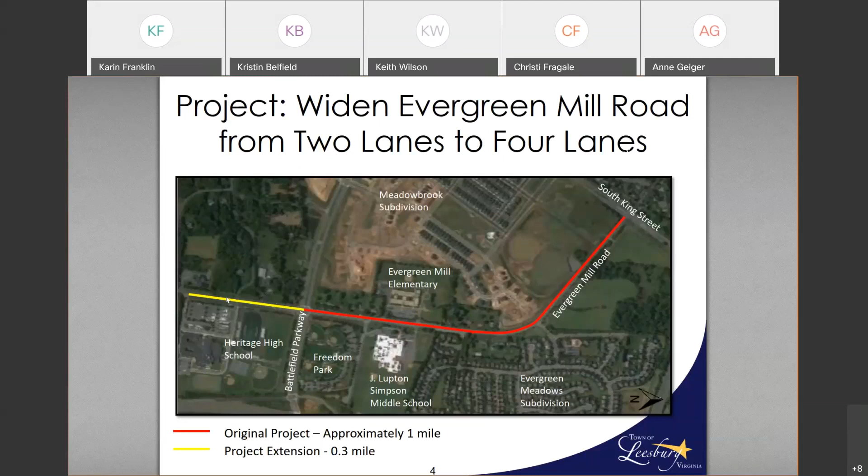The project is to widen Evergreen Mill Road from 2 lanes to 4 lanes. The original project, shown in red, went from South King Street to Battlefield Parkway, about 1 mile. During the scoping and initial design phase, it was determined that it would be advantageous to add the section of road in front of Heritage High School to help with congestion issues at the entrance. So the yellow part was added, increasing the project to 1.3 miles.

A little bit about the project history. In 2016, the project design was funded in the Capital Improvements Program. Between 2016 and 2018, we underwent scoping, coordinating with the Battlefield Parkway design and some potential development projects. It was during that time that it was identified that it would be advantageous to extend the project limits to include the Heritage High School frontage. So from 2018 to present, we worked on extending those project limits, obtained additional funding for that portion of the project, and completed the 30% concept plans.

The goals for the project are to improve traffic flow on Evergreen Mill Road, reduce congestion at the high school entrance, improve safety at the intersection with Battlefield Parkway in particular, and improve pedestrian and bicycle connectivity. The project includes widening from 2 lanes to 4 lanes, adding turn lanes at intersections, rehabilitating or adding curb and gutter, trails and sidewalks to the full length, adding storm drainage and management systems, and improving signal timing to reduce congestion.

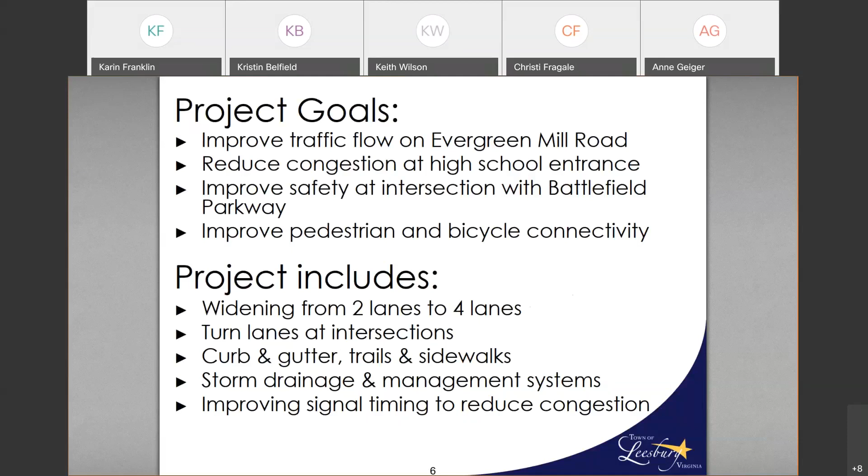At this point, I'm going to turn it over to Kristin Belfield, who's going to tell us about the traffic study. Thank you. My name is Kristin Belfield, I'm the traffic engineer for WSP, and I'd like to discuss the traffic study for this project.

Prior to determining the roadway layout, we study the traffic operations throughout the study area. Our study area goes from South King Street down to Heritage High School. We did traffic counts in February 2020 before the COVID pandemic hit. A fun fact is that this was the last set of traffic counts that we got on all of our projects right before the COVID pandemic hit, so we got this in just in time.

We take those traffic counts along with regional projections and development projections and project out the traffic to a future year, which is 2045. We took the Meadowbrook Farm development, the nearby Compass Creek development, and regional growth, and projected traffic volumes out to 2045. We expect to see approximately an 80% increase in traffic by the year 2045, so the town is being proactive in implementing these improvements before the significant increase in traffic. It may go from about 11,000 vehicles a day now to up to 20,000 vehicles a day in 2045.

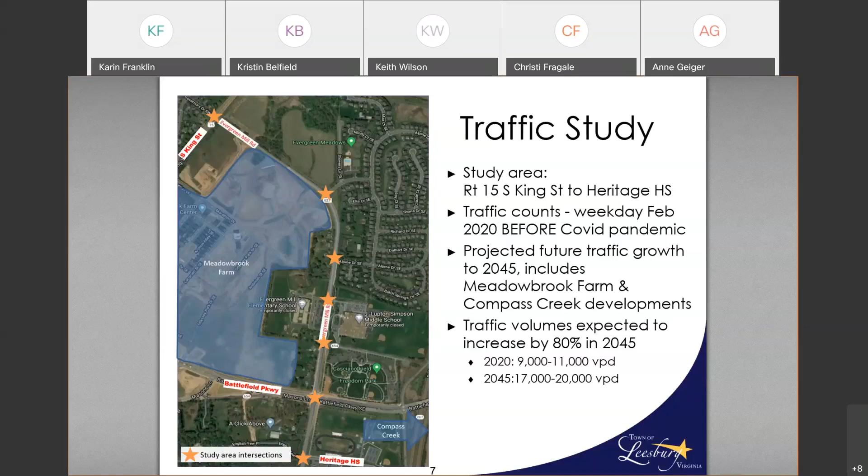So the traffic study will help us determine the intersection layouts with some consideration for geometric constraints. The study showed us that we needed left turn bays at all of the intersections, dual rights going northbound at South King Street, and dual lefts going westbound on Battlefield Parkway.

The traffic study also showed us that we needed to extend the improvements to Heritage High School, so the town has done that.

The study also showed that there were some safety issues with crashes at Battlefield Parkway and Evergreen Mill Road. That's kind of the crash hotspot, if you will, for the corridor, where most of the incidents occur.

So the improvements include changing the signal phasing to protected phasing, which is basically adding green arrows so that left turns only travel protected, by themselves, without having to worry about opposing traffic. The left turn signals eastbound and westbound on Battlefield Parkway are going to become protected lefts, which will significantly reduce the angle crashes experienced at the intersection of Evergreen Mill Road and Battlefield Parkway.

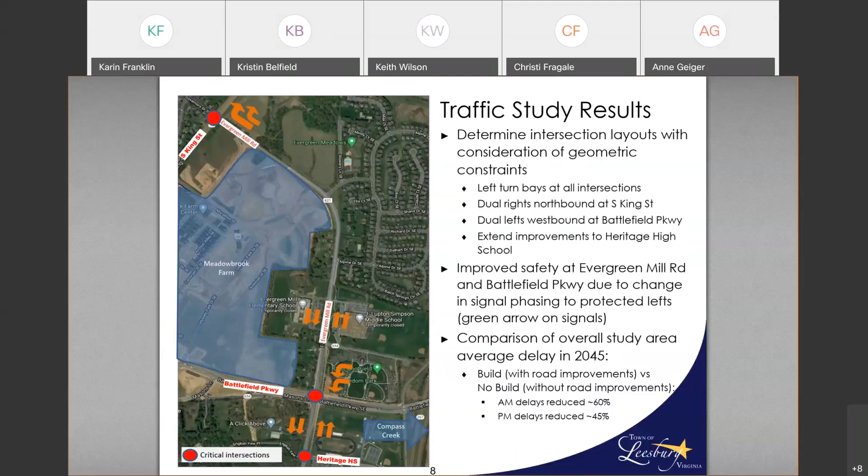In delay time. So now I'm going to turn it over to Christi, because we take the traffic operations study, and this helps us to determine the intersection layouts. Christi is going to go into more detail about the roadway layout and intersection layouts.

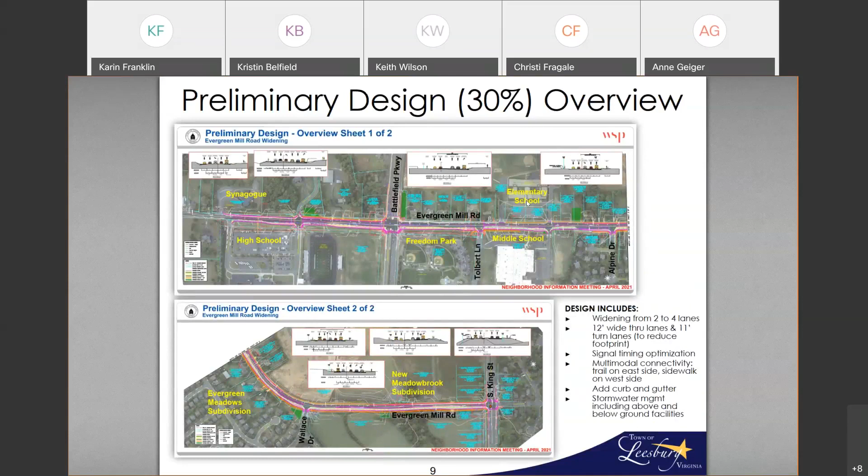Another challenge for this project is all the jurisdictions. About 2/3 of this project is within the town limits. North of Battlefield Parkway, this is all the town. South of Battlefield Parkway, this is within Loudoun County and VDOT's jurisdiction. So there's a lot of interagency coordination going on in this project, with 1/3 of it within Loudoun and the other remaining within the town. And of course, not to mention we have all the development going on all over the place, coordinating with those developers for the new subdivisions, as well as the fire and rescue and park service.

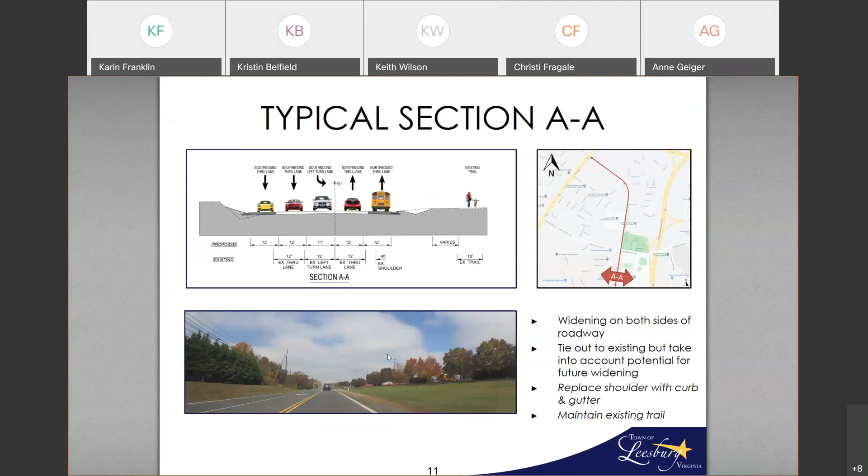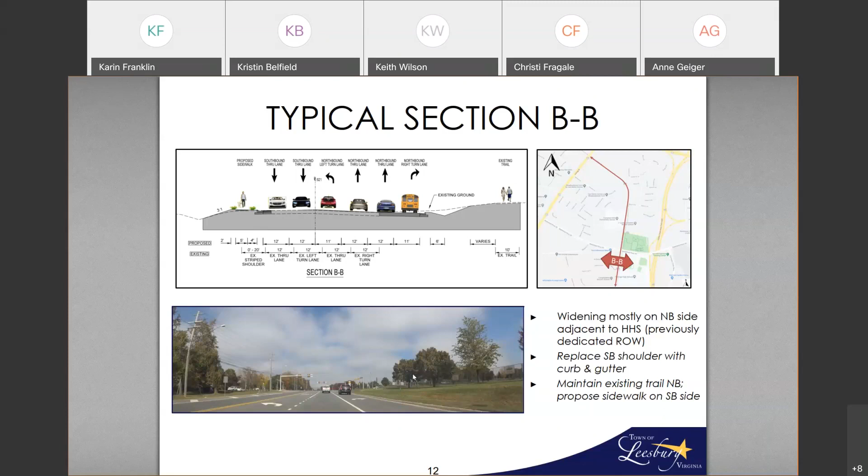Okay, moving along. So now we're just past Freedom Park, heading up towards Tolbert. You can see here we have, again, one southbound lane, a striped median area, a northbound lane, and then a right turn lane into the parks onto Tolbert.

In the future conditions, we'll be widening again, maintaining that widening on the right side here towards the previously dedicated right-of-way on the park property. We're going to be holding the existing curb and gutter on the left, which was recently constructed with the widening project at Battlefield.

So you can see there's new curb and gutter, some new sidewalk, some new driveways. We're trying our best to avoid impacting those recent improvements. And again, the trail will be maintained on the edge of the park property there.

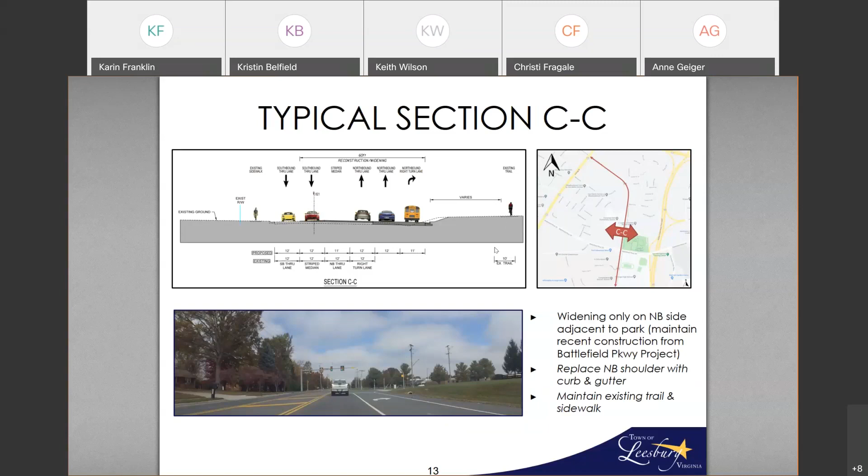All right, we're continuing our stroll. So now we're coming up on the schools. On the left we have the elementary school, on the right we have the middle school. We have one southbound lane, a turn lane into the schools, and a northbound lane.

So here we have the shoulder section on the right, and curb and gutter on the left. Here's where we're also trying to maintain that curb and gutter on the left and widen into the right into this shoulder section.

Another benefit of widening over here to the right is that it actually lines up pretty well with the pavement approaching Alpine. It was widened there when that development was constructed, so we can utilize that.

And then we'll be reconstructing some of the sidewalk in this area and fixing some of the ramps. The trail will be maintained on the right side. Part of it might be relocated a little bit due to the widening, but there'll still be the same trail there, just maybe a couple feet farther.

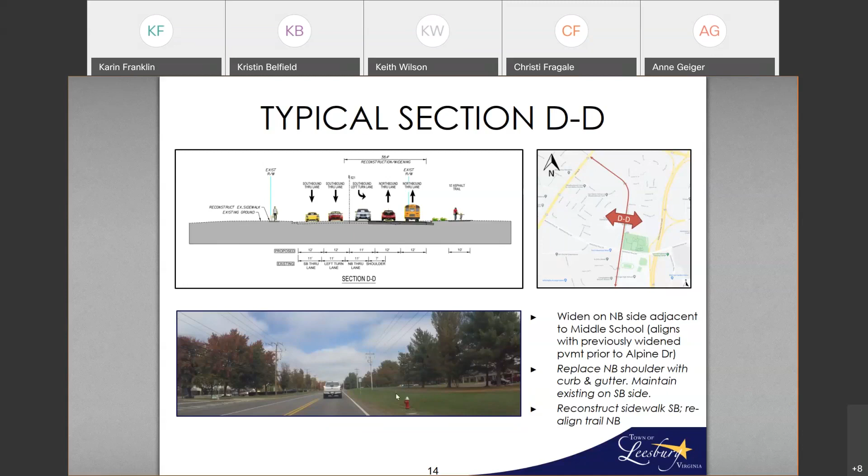So now we're coming up along the curve at Wallace. This is a really tricky section. You can see we have utility poles on either side, so we're really threading the needle, trying to avoid everything that we can with this section.

Here we have the one southbound lane. We have the striped median again, a northbound lane, and then a right turn lane into Wallace.

So here we're going to be adding, squeezing in a little bit of sidewalk on the left, and then we'll be widening to the right and adding the trail. One thing that's a little bit different about this section is that we'll actually be converting this striped median to a raised grass median.

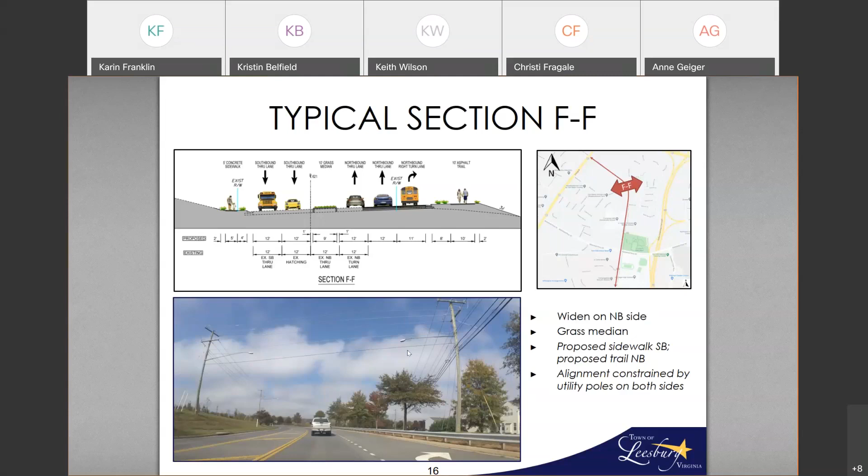Okay, so now we're coming up on where the new pond was just built, and you can see some of the earthwork in this picture. This is one of the challenges that I had brought up during the previous slides. You can see it's a small section here—we only have one lane in each direction and a little bit of shoulder. It's really tight between these hills.

So it goes up real high to the pump stations, and then it goes straight down to the floodplain within maybe 20 feet. On the left side, this is where it goes down to the brand new pond that was just constructed. So you can see our proposed section, we're going to be putting in curb and gutter.

We'll be replacing the guardrail. Then we'll have our sidewalk on the left, and pedestrians will be protected by a handrail. We'll have a slope down tying out to where that new pond is, and on the right side, we'll have the two lanes, then the trail, and then another handrail.

This section will also have some raised grass median. One thing I wanted to point out with this section that was really important when we were setting the alignment was thinking about the maintenance of traffic. Here we can actually build this whole half of the roadway offline, so you won't be impacted as you're driving on this side. It can stay open just like everyday traffic until we're ready to open the whole road, so it really should help minimize some of the impacts.

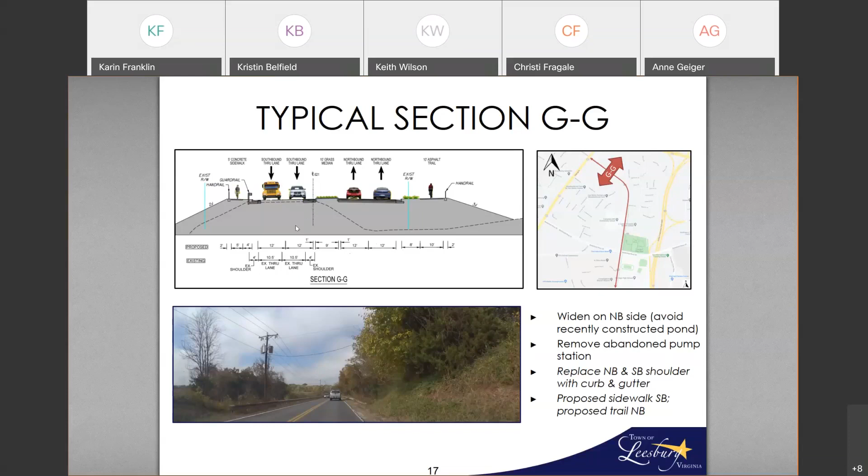All right, so now we're at the end of the project. Everyone got their steps in today. We're heading right up to South King Street, and you can see here we have one lane southbound, we've got a lane northbound—it's actually a through left northbound and then a right turn northbound. This is also an open shoulder section.

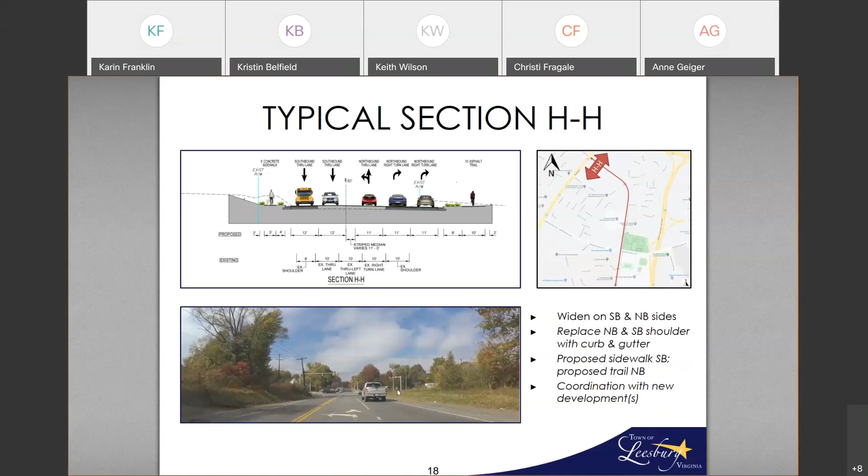In the proposed conditions, we'll be adding a lane on either side—you can see here by the dark gray. One thing to keep in mind with this section is we know today it looks open, there's open space here and there, but we understand that, like anywhere in the town, things are coming up for development pretty quickly. So we'll be coordinating with any future developers and making sure that our plans jive with theirs for this area.

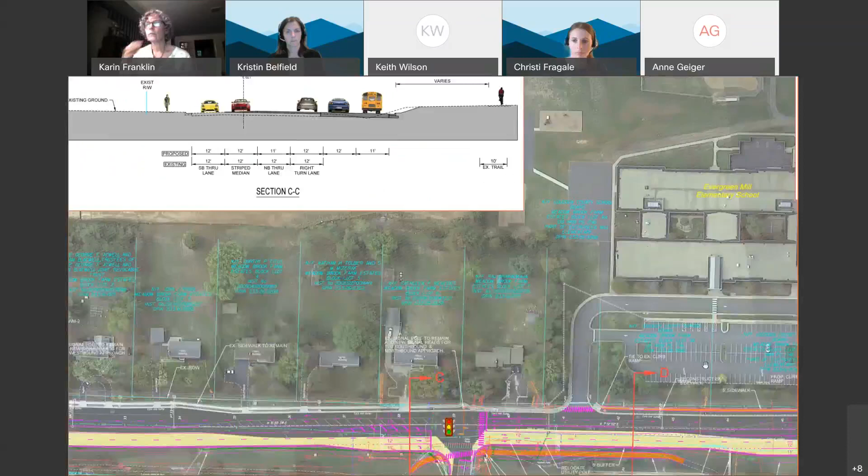All right, Christi, maybe you can provide a little bit of information about how the HOA entrance is going to look. Yeah, sure, no problem. I'm going to zoom in a little bit to this area on our exhibit without getting too far into the weeds. You can see this yellow area.

This will be the widening. I believe this is where you're referring to, approaching Alpine Drive. So we'll be pulling the trail back a little bit, and then we're actually going with a curb-abutted section here. For most of the trail we do have a buffer between the curb and the trail, but for this section, because it was so constrained, like you were saying, I know you have your Evergreen Meadows sign - it's a little hard to see, but it's right here - we're trying our best to avoid that.

The landscaping in front of it will be impacted, just because we ran out of space here, but we're hoping to avoid the actual sign, and any impacts will be replaced, and any landscaping that we can redo in this small buffer will be done as well. I'm not sure, Karin, if you wanted to add anything else, but that's the gist of what's going on in this area. Hopefully you guys can see.

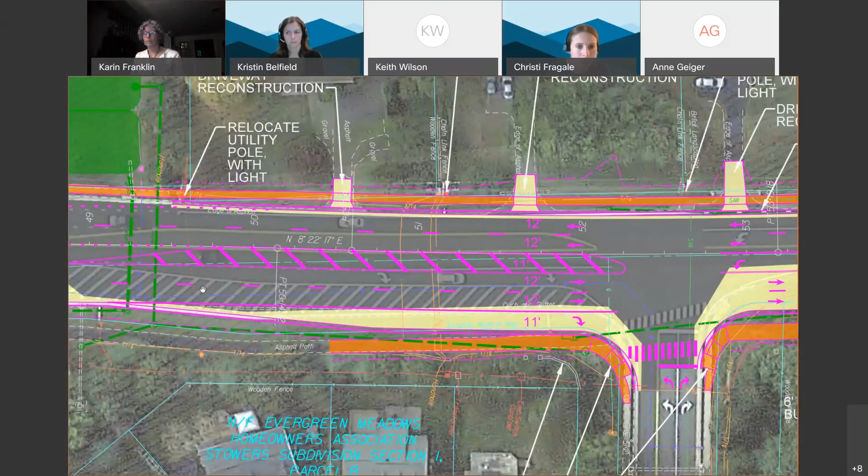Can I zoom in a little bit more? Do you have any- the existing striped area, will that become a turn lane? Is that true? So the striped area, you can kind of see it - we tried to put a transparent gray over it so you could still see underneath what was going on. Here's the striped area, so that will become a through lane.

Then basically from the edge of that is your right turn lane. That lane lines up and goes in front. So there will be two lanes widened towards the school in this yellow area, and then only a sidewalk on the opposite side, and that will be able to access it from the orange area.

Will you be adding these pictures online? Yes, we'll be putting all of this on the website for everyone to drill down into some more of the details, and hopefully get some great comments that we can incorporate into the 60% plans.

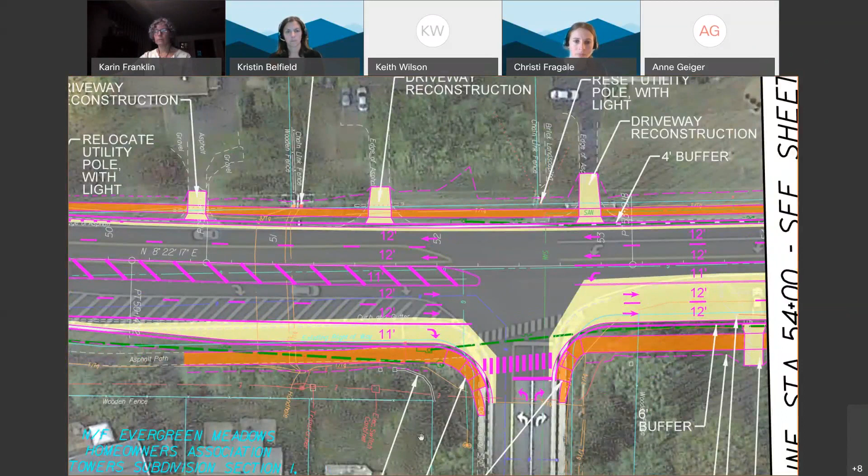Real quick, I had heard something about relocating the utility poles or making things underground, but then I also heard you saying you're trying to avoid the utility poles. So are they going to remain where they are, or is it going to be put underground?

So on the southbound side, we're trying our best to really avoid all those utility poles. We might be impacting one of them, I think, right where the sidewalk ends - right here. We'll need to relocate that utility pole. So those won't be going underground.

But I do know on this side, let me zoom over a little bit, in front of the middle school, there are a few lights here. I believe they're underground in front of the park, and then they also go underground again as we approach your community. But there are a few poles in front of the middle school which we will be impacting - there's one here, another one here, that are within the widening limit. So it's something we're looking at, but it'll be a cost-benefit analysis, because it could potentially cost more than just relocating them. So that's something we're looking into, but it will depend on the cost.

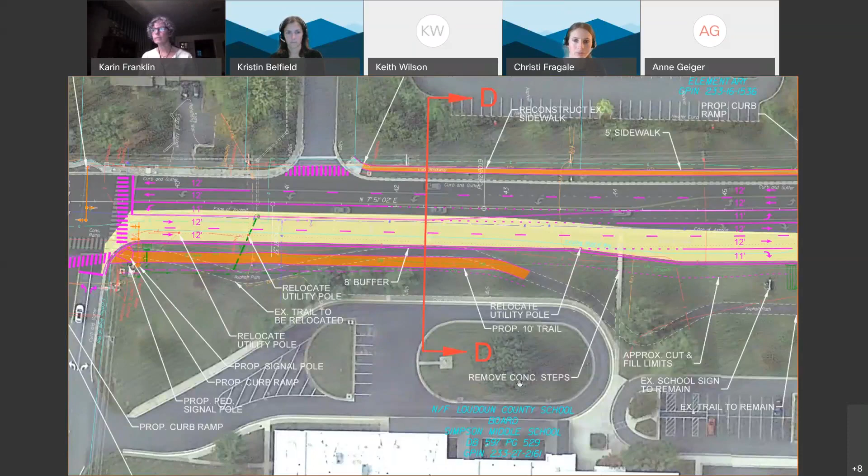And Karin, did you want to add anything on that? Yeah, it's really sort of based on whether we can accommodate it in the budget as well, so cost becomes very important. Okay, thank you. All right, thank you.

I actually am on the Loudoun County Planning Commission, and I represent the Catoctin District, and a portion of this project will run through my district. I wanted to inquire, will this need to come to the Planning Commission and then the board at all for any kind of modification to county land? Also on that side of the county where those houses are, I guess that would be the west side, will any of those houses need to give up some land? It looks like it might be a few feet for each of them. I'm curious where you are on that. Christi, why don't you speak to the right-of-way issue, and then I'm going to ask Keith or Renee to speak to the first question.

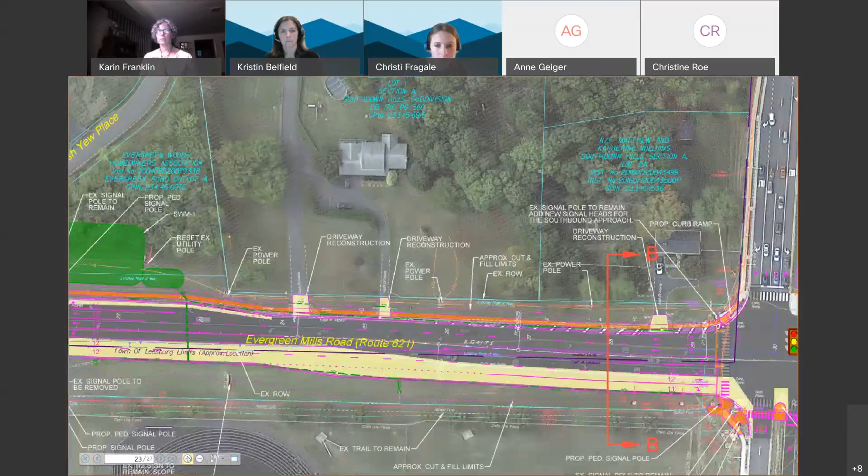Sure. I just zoomed in on the area I believe you were asking about with some of these residential properties on the edge here. We are trying our best to avoid any impacts on those actual properties. You can see the right-of-way line is this cyan line here. These are still 30% preliminary plans, but what we're doing is running our curb and gutter along the edge line. You can see that existing striped shoulder right here. We're putting our curb and gutter, then a little buffer, then the sidewalk. So the sidewalk is still pretty much within the same pavement limits they see today. As far as pavement goes, it's not anticipated to change too much. There will be some driveway impacts because when we put in a sidewalk, we need to put in an accessible path through each of these driveways, so it might change the grading a little bit. That's why these are shown in yellow. We don't anticipate it going past the right of way. If it does, it would only be maybe a few feet or some temporary construction easements, but nothing major.

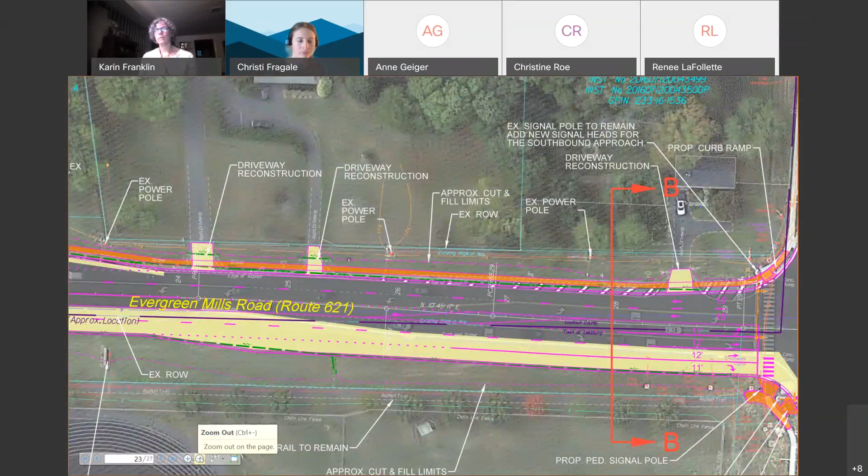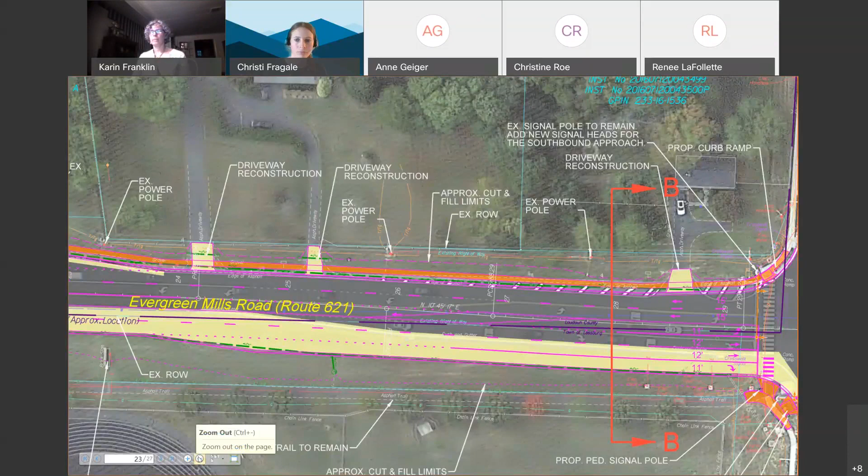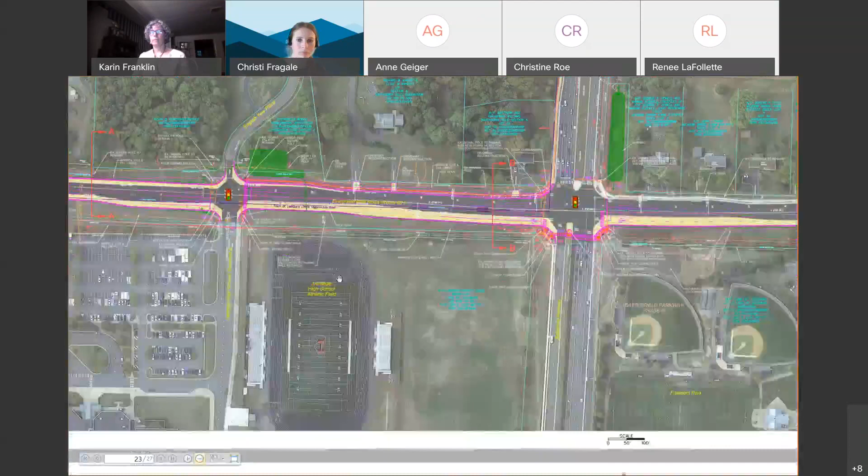Thank you. Okay. Mr. Miller, to answer the question about going to the Loudoun County Planning Commission or Board of Supervisors, it's our understanding, working with the county's DTCI staff and the Loudoun County Public Schools engineering staff, that this project is in conformance with their design standards and would not need to go to either the Planning Commission or the board. The town has reached out to Loudoun County to potentially do a boundary line adjustment to bring the road section only into the town corporate limits, which would put it under town maintenance. The primary reason is to get the traffic signal at Heritage High School into our signal system so we can coordinate it with the signal at Battlefield Parkway to make ingress and egress from the high school in morning and afternoon times more effective.

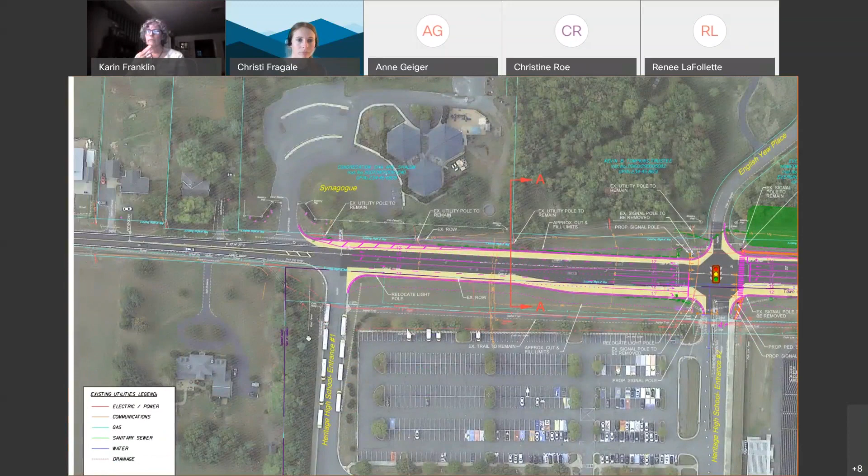Okay, one other quick question, is this more planning commission stuff? At the end of this, by Heritage High School and the synagogue, is where the road work will end. From there all the way down, as part of the comprehensive plan for the county in 2019, they moved that section from that first house all the way down to Shreve Mill and beyond to Loudoun Country Day School into the transition policy area, and the landowners are going to have applications coming in to rezone their property for additional housing. Part of that will include, without question, a full widening of Evergreen Mills from that point forward.

So I assume that whatever future widening and design standards happen for the rest of the county's portion of Evergreen Mills Road, this section at Heritage, behind Heritage and the synagogue, will be set up for a smooth connection into the widening of the rest of the road. That is our full intent, and that is why we have kept engagement with the Loudoun County DTCI staff, so they are well versed in what we're doing with our design in front of Heritage and our termini point. Okay, terrific.

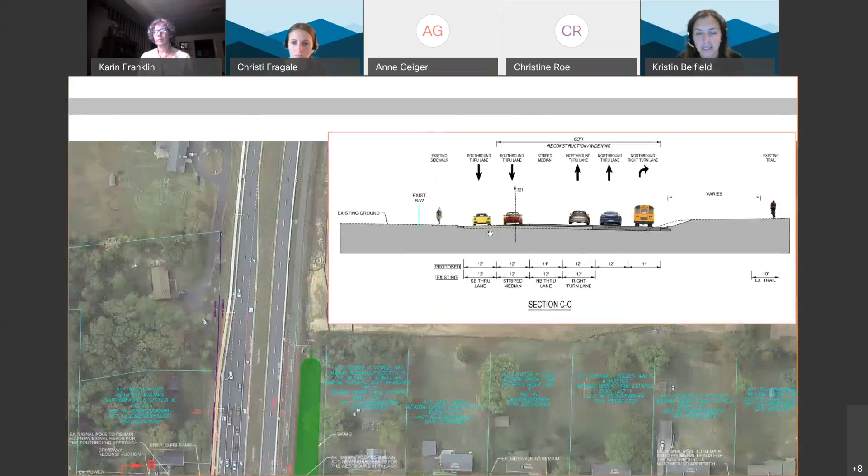All right, I'm going to pass this over to WSP to discuss. Sure, I can take this. We are considering and evaluating a location for a crosswalk because we understand it's important to get from one side of the road to the other for connectivity. So we're considering locations anywhere from the intersection of Alpine to maybe closer to the schools. There are a lot of elements we need to consider with the location for the crosswalk.

We also are considering the appropriate signage, whether it's a pedestrian activated light or specific pedestrian signs that really highlight the crosswalk in those locations. So it's definitely something being considered, but we're just trying to evaluate this specific location. If you have comments on locations you would prefer, please send those to Karin, because that gives us good feedback as far as what type of users, where people want to cross, and where they're coming from and going to, so we can appropriately locate that crosswalk. I don't claim to be a traffic engineer, but Kristin has told me that some of these areas will be better than others for placing that crosswalk based on how the traffic moves, etc. So we do have some limitations as to where we can put that crosswalk.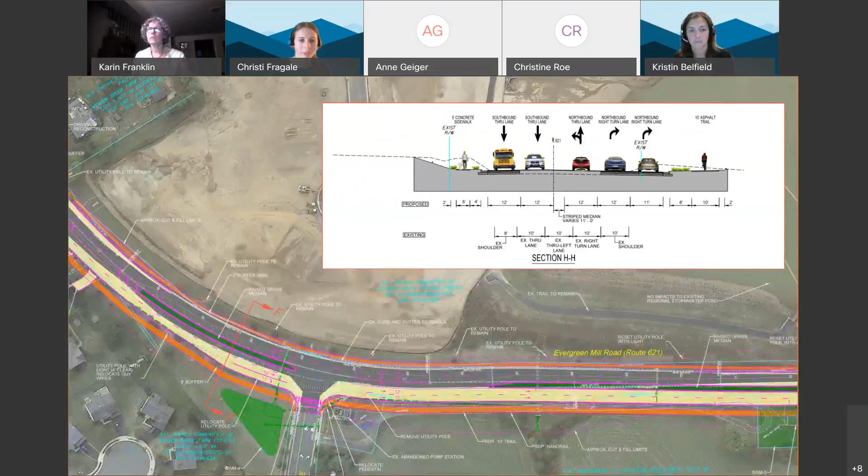The other question was about the sidewalk. You can speak to that. I could take on that question. So just to follow up quickly on the locations for the crosswalks, one thing we're looking at is making sure it's safe for crossing.

So we want to locate it somewhere where we can fit a pedestrian refuge. That's one of the things I was pointing out near Wallace. That's another bonus of having the raised median there, because we can potentially provide a little cut through, which makes it safer for pedestrians to cross the traffic. Then the same thing near Alpine, we do have the striped median there. We don't have the raised median, just the striped one, but we might be able to use some signage or different patterns in the pavement to help that stand out and be safe for all users.

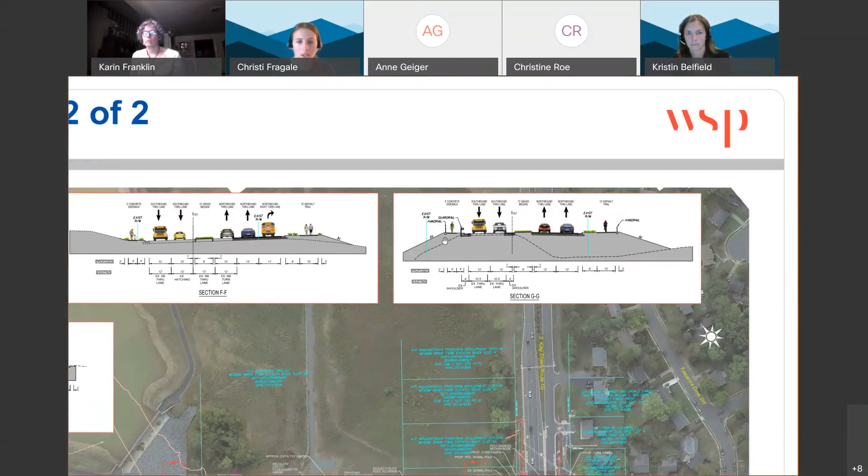As far as the potential connection to the new trail, I believe you mean the trail that runs along the pond down here. That's not part of the scope of this project. It would be a very tricky connection, I believe. The grades go down real steep because this is around the pond, which is much lower than where we're going to be. So the section there, let me zoom to it. It looks like this: we're up here, and that trail is down at the bottom of this slope. Per ADA, we definitely can't traverse down a 2-to-1 slope, so it's not in the project scope right now to connect to that.

I just wanted to add too that we'll be coordinating with the schools on the crosswalks as well, to make sure it works with what they support. So just to follow up on that previous question. Do we have any more questions, Christine?

Good evening, Christian Alfaro, I'm a resident over at Evergreen Meadows. My concern is regarding the crosswalks. I like the idea of having one connecting Meadowbrook Farms and Evergreen Meadows at the intersection of Wallace. My concern is more on the school area and close to the Alpine intersection. Looking at your design here, I wanted to make a recommendation for consideration. On the elementary school side, you've got a green rectangle towards a little more to the right. Yes, that spot right there.

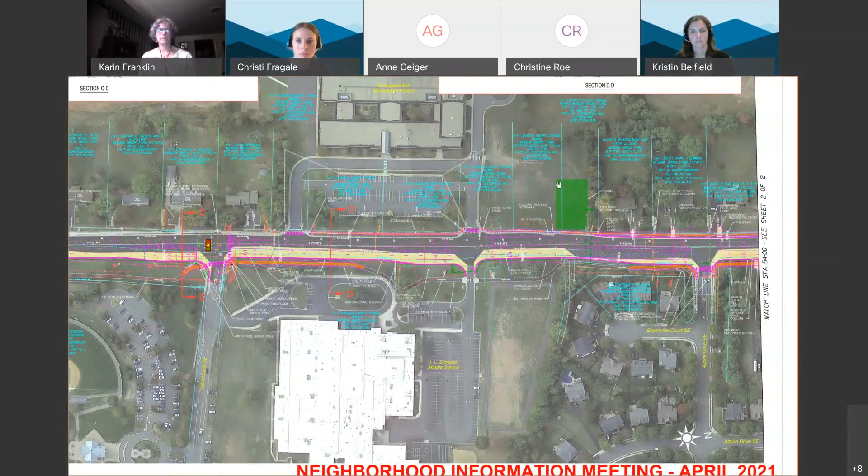I think that would be an optimum area to have a crosswalk for the children from Meadowbrook Farms going to the middle school, and Evergreen headed over to the elementary. There is a small black path that goes between the homes that connects to the bottom of that walking trail at the middle school. So a lot of children take that path exiting the neighborhood instead of going through Alpine to Evergreen Mill. If they were to walk up that path and need to go to the elementary school, I think that would be the best route. Naturally, as humans, we like the path of least resistance, the quickest way there. While we may design a beautiful path, we're going to go through the easiest route. So I would ask that you take that spot into consideration.

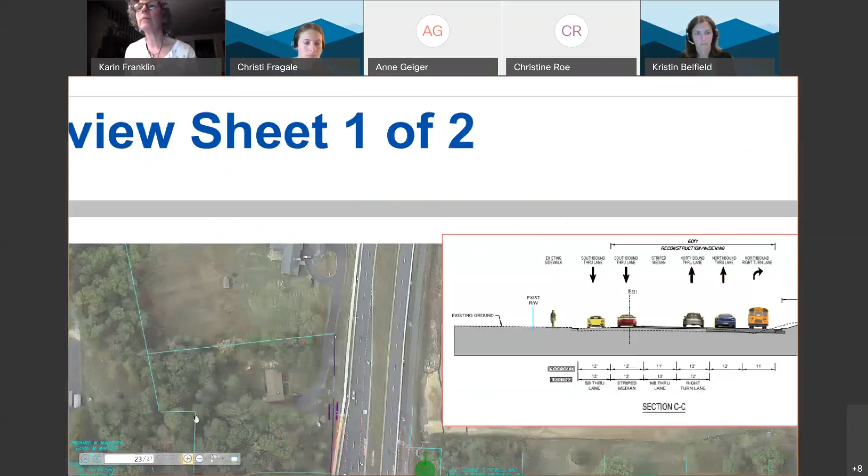All right, do you guys want to take that? Without getting into too many specifics, because we can always follow up offline—so where did you mention? Near the synagogue, sir? Yes, where it goes from 4 lanes to 2 lanes, it really doesn't show a whole lot, and from all your pictures, I don't see how it's just going to go 4 to 2 without having tapers or turn lanes for the synagogue or whatnot.

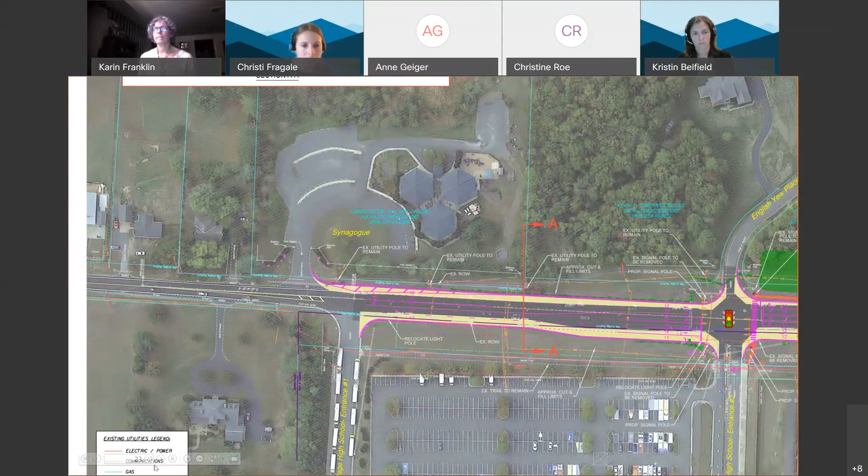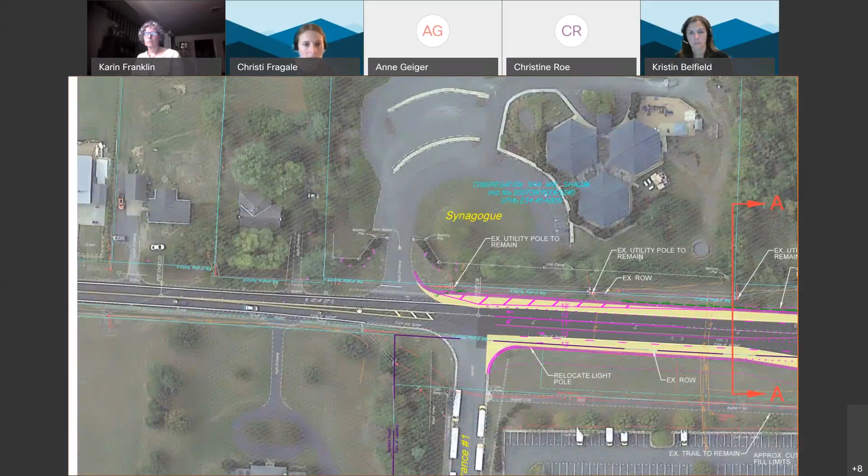So what we're doing here, it's a little hard to see in this graphic, but we do have a taper coming in right here, and that's all designed for the design speed. So you'll be coming in with 2 lanes, and there'll be signage and everything too, and then this lane will drop into 1 and then transition past the synagogue. The reason we have the curb and gutter offset, and we didn't just bring the curb and gutter in—this is actually just a striped line—is because we don't want to construct something that might get ripped out in the future. So we're setting ourselves up for the future widening south of this project.

And then on the northbound side, you'd come from 1 lane and it can just open up into 2—there's no problem with that. It's just on the southbound direction you need the proper merge, which we're showing. So basically there's very little impact past the property line then. Correct. Okay, thank you.

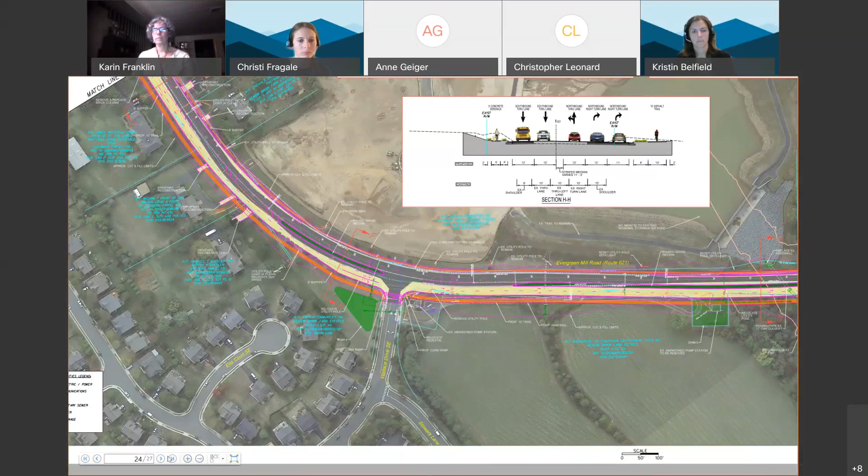My other question was about impacted homeowners, potentially in the Evergreen Meadows community. It looked like at the Alpine Drive entrance, some of the improvements are pretty close to the property line, so I was curious how that would be handled. Will the homeowners be contacted? Will there be discussions about potential impacts to their property? Sure, that sounds like a good question for Keith, our land acquisition specialist. Keith, you want to take that one?

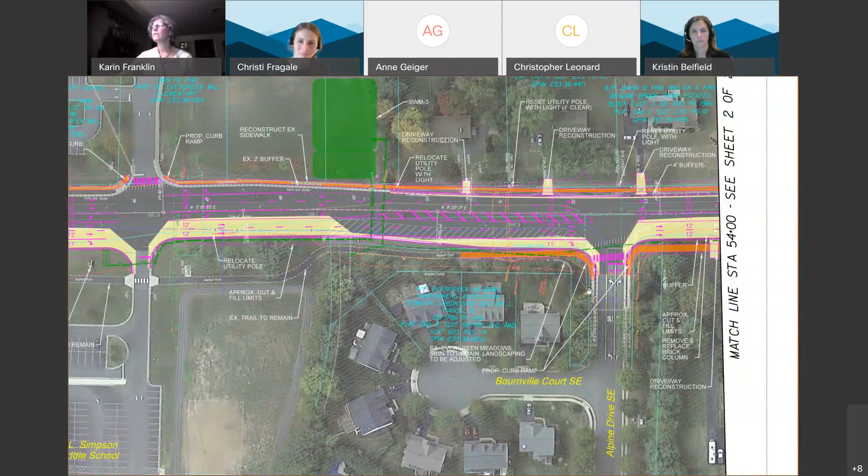Yes, I can take this one. So as a part of the acquisition process, the properties will be appraised to determine the fair market value of the land rights and easements that are needed. Then the homeowners, landowners or HOAs would be contacted with an offer letter to make a bona fide offer for the acquisition of the land rights needed, given copies of any valuations and appraisals that have been prepared, copies of the acquisition plats and conveyance instruments needed for the conveyance of the land rights. Then copies of the plan sheets would be given to the landowner so we could go over the individual impacts to each property and how the roadway will impact the property and the remainder. So the landowners will be contacted, given information, and have an on-site review of the impacts of the project.

And just to follow up quick, if you were concerned about these properties right here, I'm not sure if these were the ones you were mentioning. I don't believe we'll be impacting these particular properties. So you can see, I'll zoom in a little bit more - and again this is only preliminary, but we're trying to hold our cut fill limits, which is our limits of construction basically, to this pink line. It's a little hard to see, but we'll be reconstructing a little bit of that trail, though it'll be almost in the same spot it is today, just regraded some. Then we'll tie out our slopes. So here's the right of way, the property lines for those parcels - we're hoping not to encroach on their rear yards there. But definitely if we were to, we'd follow the process Keith just mentioned.

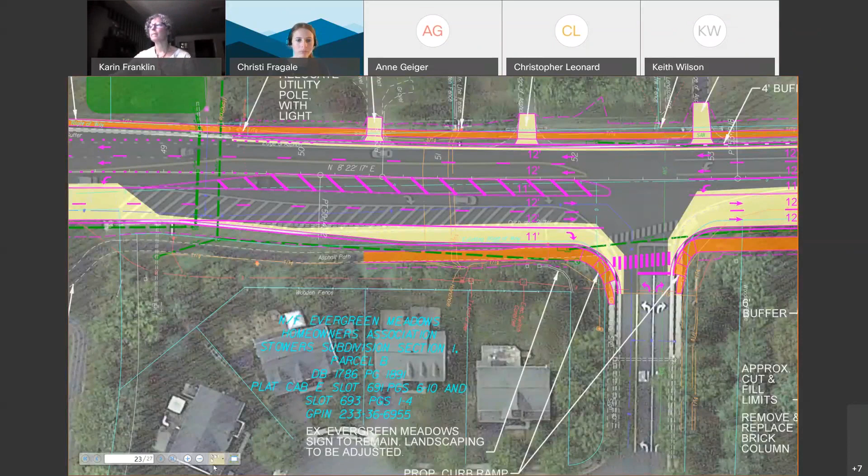Okay, so next up on the list was: what will be done to block or reduce road noise, which has already increased on the current two-lane road since Battlefield Parkway was added?

Well, that's a really good question. And I came into this project a couple years in. Is that something, Renee, do you have any thoughts on that you'd like to share? This is a difficult question to answer. The funding sources on this project do not include federal money. If we had federal money included on this project, it would require a noise study to be done with this project. The current funding sources do not require that, but if you can send Karin an email and let her know which property you are primarily concerned about, we can look at what it would entail to do a noise study for that particular area.

We can look at what it would entail to do a noise study if we find that it would be necessary. And just because a noise study is done does not mean that any mitigation would be put in, because there are specific criteria that have to be met with any noise study to determine whether that type of improvement would go in. No, that's probably not the answer you want to hear, but we will look into what could potentially be done if you send Karin an email with the address so we know which area to be looking at.

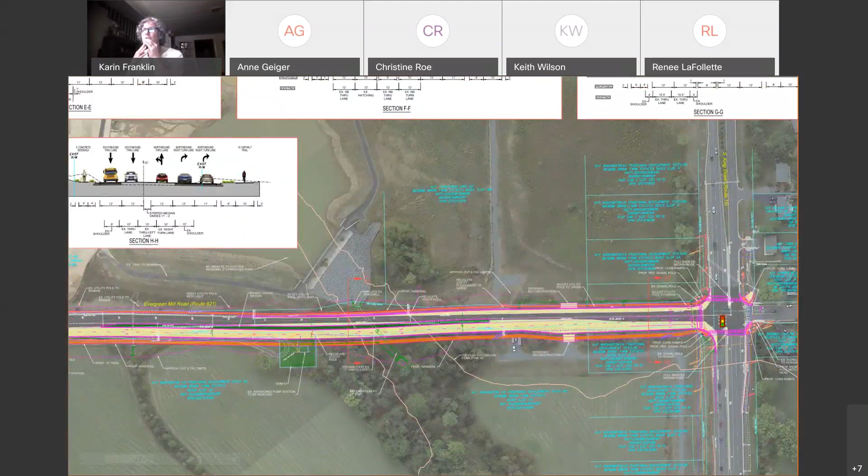Okay, yeah, another really good question. Keith, do you want to speak to that a little bit? Yes, I can speak to that.

So during the land acquisition process, we take into consideration what is physically there. We cannot insert any plan approval or land development approval application. If the owner of the property has in the works a land development application for a specific purpose, then as part of the negotiation process, we can work with them to see if we can coordinate any opportunities to develop the frontage, so that something the town constructs will not immediately need to be removed and replaced. So that's something that typically occurs. If the project is in the land development application process and is being reviewed for approval, then we can work with that landowner during the acquisition of the land rights to coordinate the work.

Thank you, Keith. Okay, next question: has there been an evaluation of running all above ground utilities underground?

Yeah, so we haven't actually done an evaluation yet. I know that that's something everybody's interested in, and we'll have to take a look and see what it would take to do that. I think we've talked to our engineer about getting some idea of what the cost might be to do that. Again, as we've said, undergrounding can be very expensive, so we would only be able to underground if it's within our budget. So we'll have to take a look at it and get back with you guys, probably at the next neighborhood meeting, when we'll have more information.

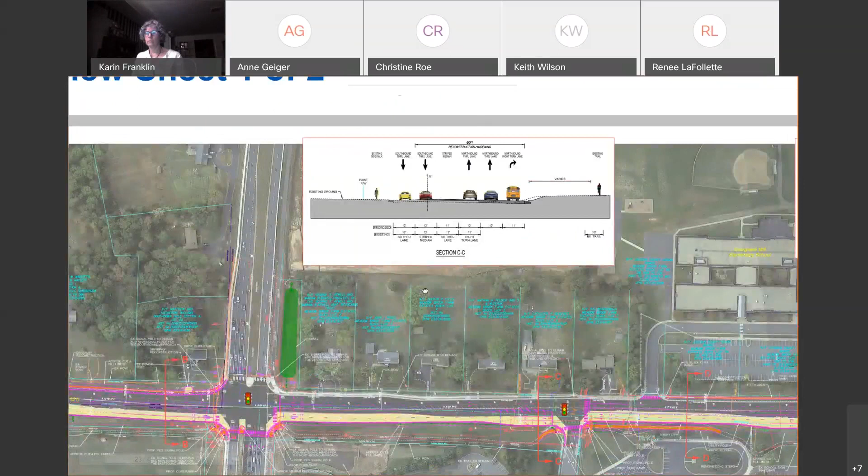Yeah, that is something that is not currently included in the scope of this project. We have asked to get an order of magnitude cost for that. And if that's something a number of people are interested in seeing done, please let us know so that we have that information, because this project will be going back in front of the Planning Commission and the Council each year when we're doing the capital improvement program for approval in each fiscal year before we reach construction. So it would be good to know from you if we have a number of people that are interested.

Karin, this is Keith. I would also like to add, when we're talking about undergrounding utilities, most residential properties along the west side or going southbound are served by overhead power lines to their homes. So undergrounding, unless individual homeowners want to participate and underground the lines to their residence, the utility poles end up having to stay as terminal poles, so the power can stay overhead from the roadway, and new transformers would have to be set over to the properties. Undergrounding also requires coordination of all the homeowners along there to provide underground service to their residences.

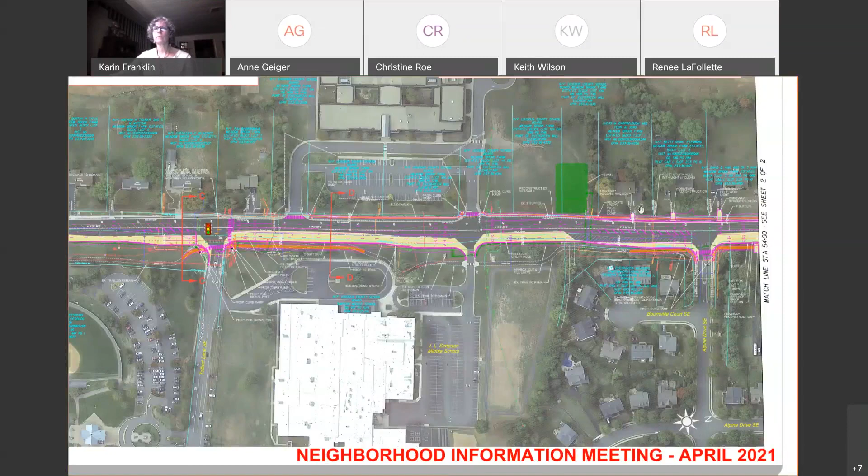A lot of this alignment was set to try to avoid impacting the poles, especially on the southbound side. So I wouldn't think we'd be looking into undergrounding on that southbound side just because there's not really much space to do so. But perhaps, like I mentioned before, the area in front of the middle school where there are a few poles left that we're going to be touching, we can run some analysis on that and see.

Okay, Christine. Next question, and this one may have been asked already. Will there be a crosswalk in front of the schools or near Wallace? Children from both communities need a safe place to cross to get to school or a friend's home.

Let me just speak to the crosswalks. We're going to have to speak with the Loudoun County Public Schools because I think they may have some strong feelings about crosswalks between the schools with the 4-lane roads. So we will meet with the schools. We hear crosswalks are important, and we'll have to take a look at it and do some research, and we'll let you know where we're headed at the 60% point. On the crosswalks, we really want to make sure we've got the schools involved before we get too far down that sort of approach.

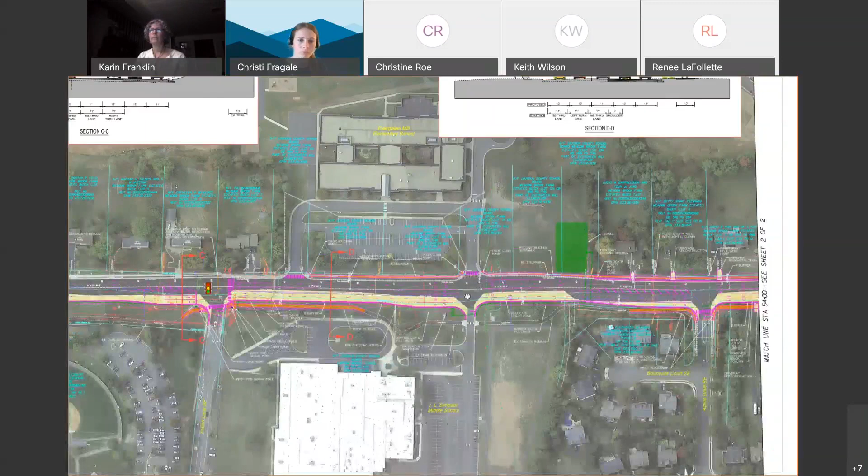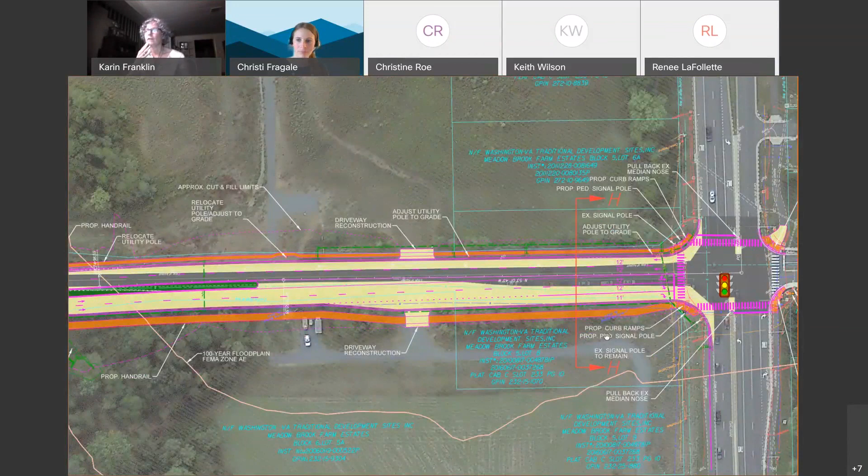So that's a question I can sort of take. I don't know if we can give you the exact numbers, but Kristin may be able to speak to it. And if you send that question again to me via email, we'll get you the exact numbers that we have right now based on our design. But Kristin, maybe you can speak to it.

Yeah, right now, the two lanes going northbound, one of them will end in the through-left lane, and one of them is going to end as a right lane. The second right turn is going to be a right turn bay added to the right side of the roadway, so that through-left movement is going to have its own lane. The traffic volumes there are very, very light - the left turns and throughs together are about 20 cars or so in the morning and about 30 cars in the evening. So that movement is by far the lowest on that approach. Those two movements combined, the right turns are a lot higher than that.

So the left-through movements will be able to stack up in that lane if they need to - they're not going to have a separate left turn bay for that. You can even see in this aerial in the background all these cars piled up, but that's in the right lane. So that's one of the reasons we're going to be adding the dual rights, like Kristin mentioned, because this is a really heavy movement. We're not going to fix everything at South King Street, but we'll do what we can within the project scope.

We won't be touching any of the turn lanes on the opposite side. That's an important piece to mention - the South King intersection itself is not part of the scope of this project. Just from Evergreen moving towards the schools is part of this project. So we're going to do what we can on the Evergreen side, and then the town will have to look at a different project for the rest of the intersection.

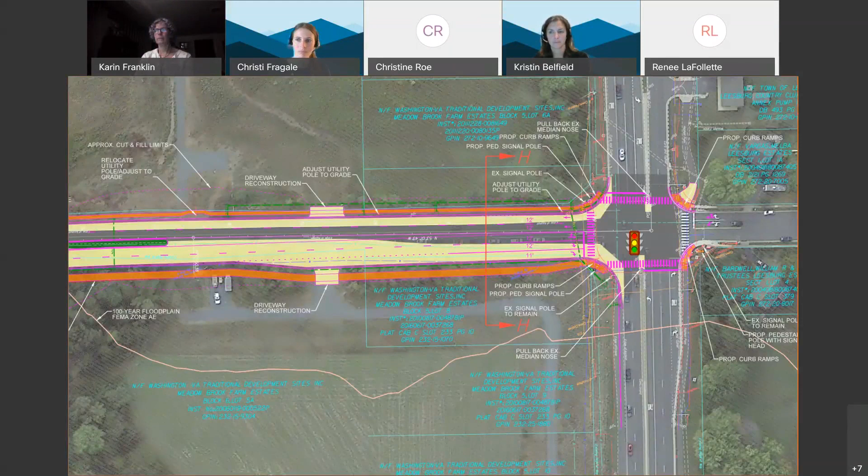Next question, could you speak about the impact on the second entrance to Evergreen Meadows or the intersection with Wallace Drive?

I could take this one. Let me zoom in a little bit more. I think this is your question, approaching Wallace Drive. So here, our section will be widened toward Wallace Drive. You can see the yellow, so basically both lanes widening in this direction. We'll also have an 8-foot buffer, and then we'll have the trail. And then there'll be some open space, and then the stormwater management facility. So you can see some of the impact lines.

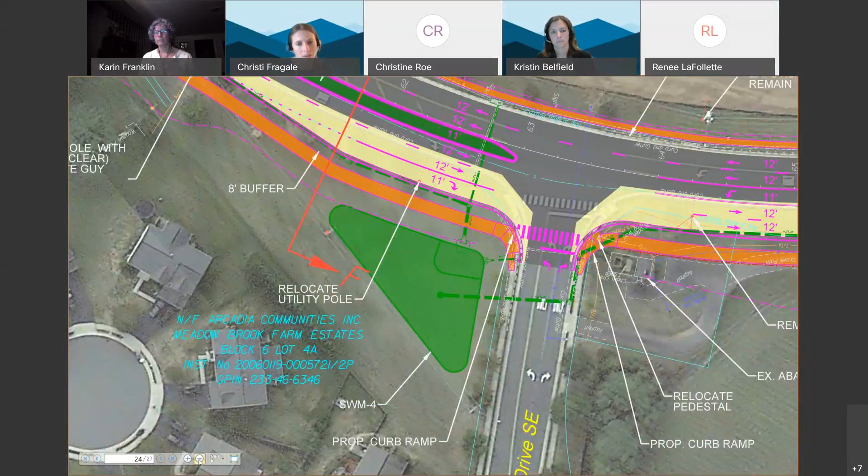Let me zoom in a little bit more. This pink line here is where some of the grading is anticipated to go to. But most of all of this is within the HOA parcel right here. And then we'll also be adding, updating the curb ramps, things like that, adjusting the crosswalk. So this is basically what's going on right near there. It's about 2 lanes widened.

I don't know if there was anything more specific, or you can feel free to post a follow-up if I didn't cover exactly what you were looking for. Make sure it's in the Q&A, not the chat. Oh, sorry. Yep, Q&A. All right, Christine.

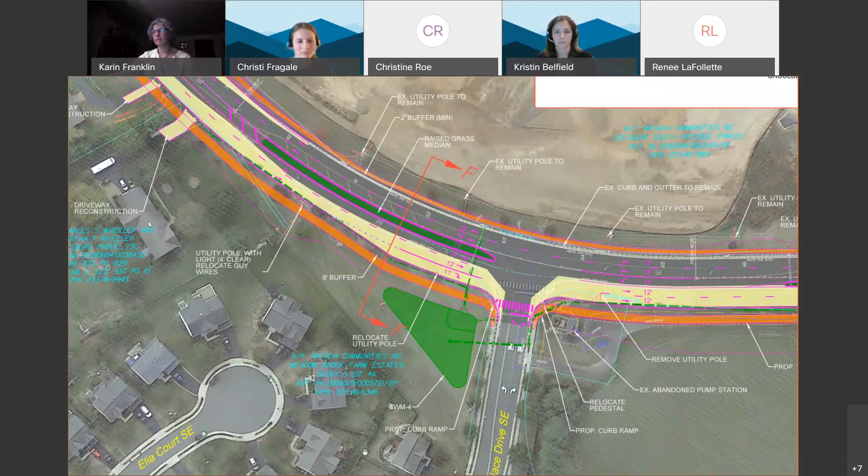Okay, next question. Will this project be done at the same time as the King Street and Route 15 interchange work?

Wow, that's a really good question, and I don't know that I have the answer. And would this be referring to the bypass improvements that could be King, right at King and 7?

Yes, so I can actually answer this as this is at the King Street exit on the 7 and 15 bypass. That work is starting this month. It will reach substantial completion by the end of the year and will have final completion by April of the following year, is the current schedule. Okay, so that project should be done before our project begins construction then.

All right, okay. So next question. Is it possible to have speed cameras added near the schools to encourage people to follow the speed limit? Speeding is a problem on this stretch of road.

And that's definitely a suggestion we can look at and evaluate more strongly. So I appreciate the suggestion. We'll look at that.

Okay, I can. We did kind of speak to that a little bit already, yeah, I think. Maybe that question might have already been answered. But we're going to be posting this exhibit too. So feel free to take a look at it, and if you have any specific questions on exactly what's going on, you can follow up with Karin. We're happy to chat with anyone, meet with you, have a phone call. But this is basically what's going on there. We're doing a little bit of widening on either side, but the improvements don't go past the second high school entrance, the southern entrance.

Okay, next question. How will traffic safety be addressed? Speeding and running red lights is already an issue. With road widening typically comes more speeding. What measures will be taken to protect pedestrians as well as other vehicles? How will this project impact traffic on King Street and Route 15?

I can take that. That one sounds like it might be yours. Sure.

We're essentially targeting the safety improvements to where we see an existing issue, which primarily is at the intersection of Battlefield Parkway and Evergreen Mill Road. There were a lot of angle crashes at that intersection. Changing the signal from permitted protected, where you see the green ball and the green arrow, to a green arrow only, and having the dual left turns, that's going to significantly improve the safety at that intersection. That will really reduce angle crashes at that location. And that's where we see most of the crashes in this corridor.

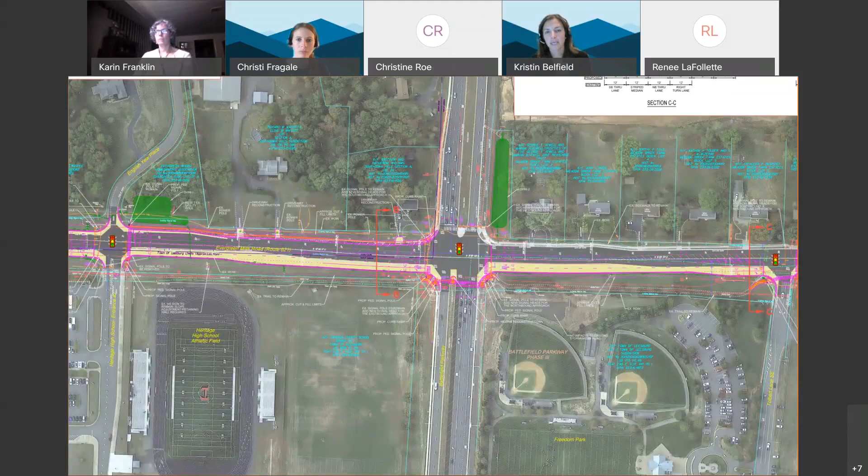The second location I would say would be up at South King Street, somewhat approaching South King Street. Now, we're not making changes on South King Street itself, so it wouldn't change anything on South King Street. But it looked like approaching South King Street, there were a decent amount of rear end crashes, and you tend to get those with stop and go type operations.

When we're improving that approach and improving the queues on that approach, you will see a reduction in the crash rate at both of these locations, crashes per number of vehicles.

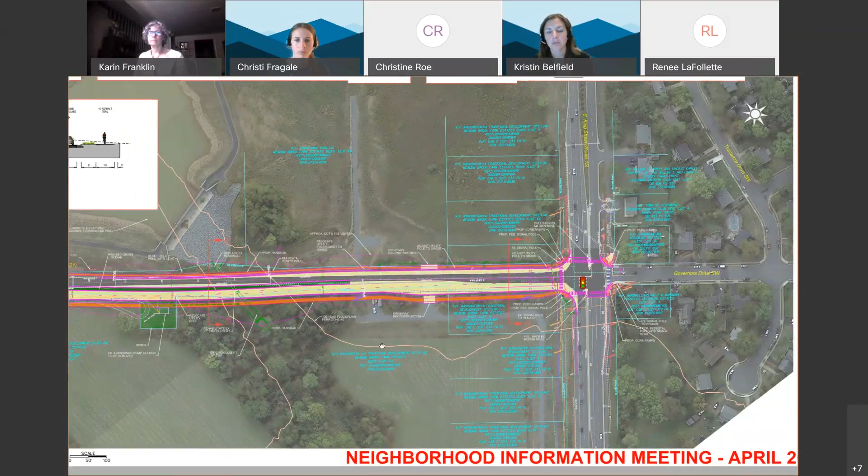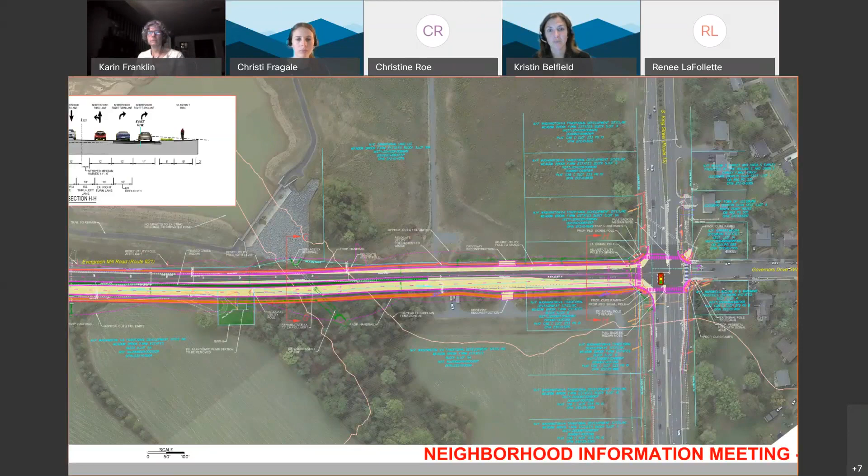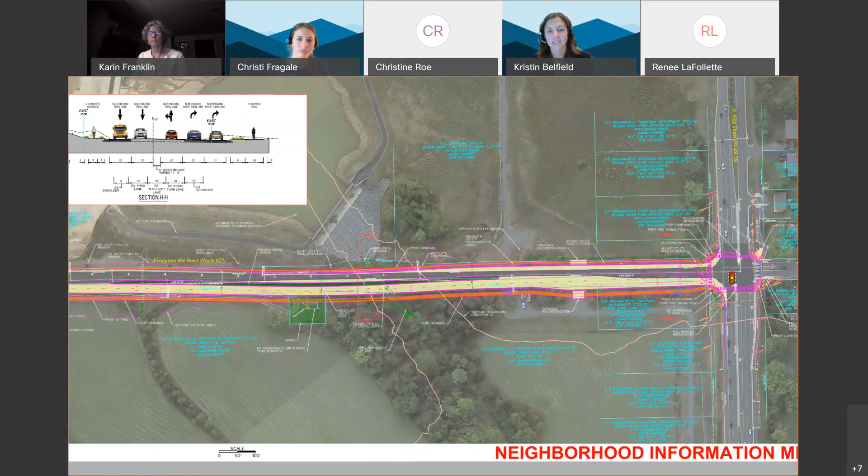In terms of speeding along the corridor, there are a couple of considerations. One involves potentially narrowing the lanes, which systemically helps increase safety and reduce speeds along the corridor. We're considering speed feedback signs, like mentioned in a previous comment, showing people the speed they're going versus the speed limit. Those are very effective, as well as putting medians in locations where we can, which really helps with head-on collisions or opposite direction sideswipes. So safety is definitely a consideration for this project.

We're targeting the safety improvements to where we see existing potential issues or existing issues, but the issues are not extremely severe compared to some of the other busier roadways. For this roadway, we're targeting improvements to those specific locations while considering safety overall and systemic measures.

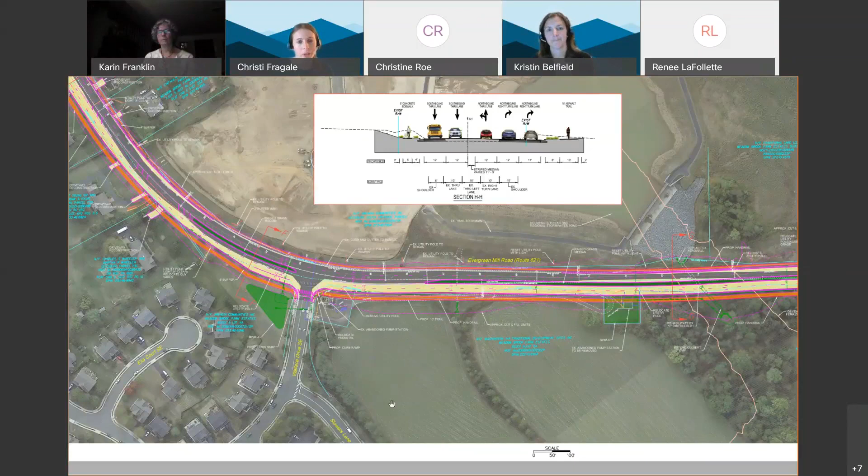I'll follow up a bit on pedestrian safety. We're definitely going to increase pedestrian safety by adding curb and gutter as well as the off-the-road trail, so we won't have bikers on the shoulder where we have that small shoulder section. Now they'll have full connectivity with the trail system, especially important for some of the younger kids, increasing safety getting to and from school and friends' houses in this area, plus the sidewalk on the other side, so it won't be like walking along the edge of the shoulder.

We've had quite a few site visits along this roadway, and you're walking along this small shoulder and then you come up to this berm and kind of just take your life in your hands making your way up here. So that will definitely be a big safety improvement for all the pedestrians and bicyclists.

All right, Christine, got any more questions? Yes, one, two, five more at this time. Are the stormwater facilities wet or dry ponds?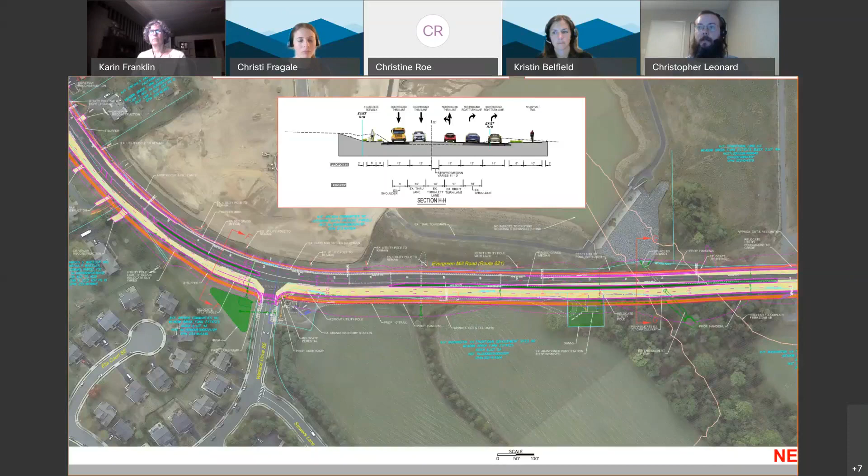I'll hand that back to Chris. Yeah, so in our current layout, all the surface facilities are dry ponds. The benefit you get with wet ponds is more efficient water quality treatment, but because of the way the project is laid out and its location, we are going to meet those requirements with offsite nutrient credits. So the ponds as shown here are dry ponds that will just be serving a detention capacity. The one under the pump station is planned to be an underground facility. I think that should cover it.

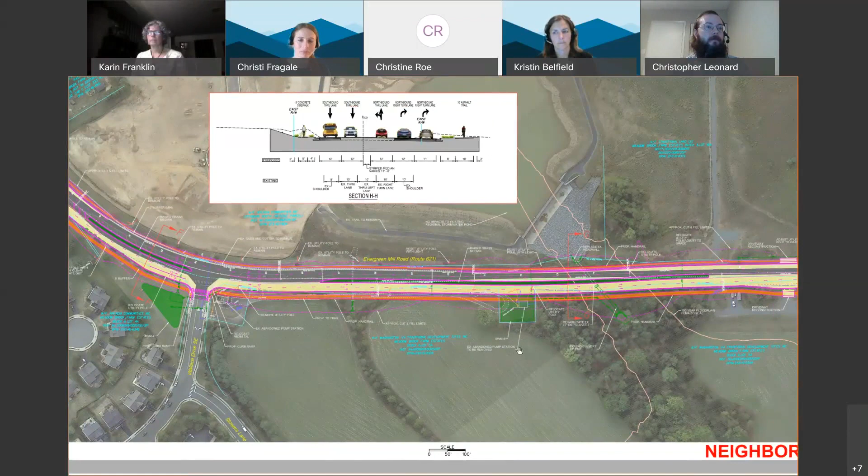Thank you. Next question: how much tree loss do you anticipate, particularly in front of the elementary and middle school properties and in front of the Alpine Drive area?

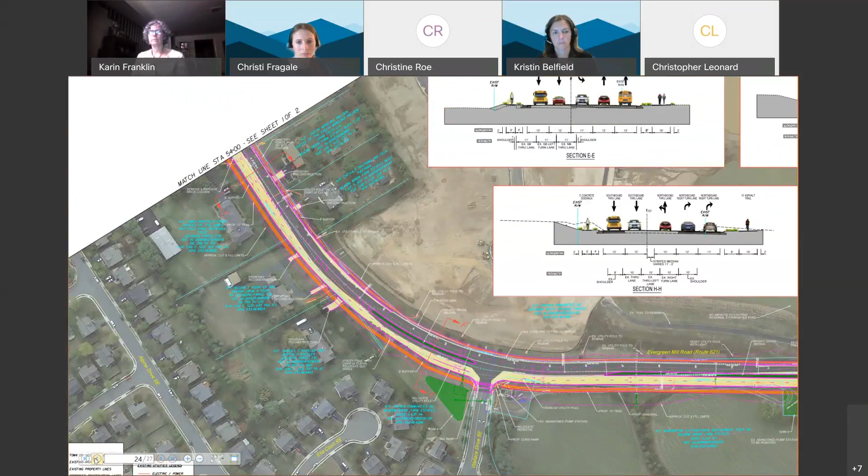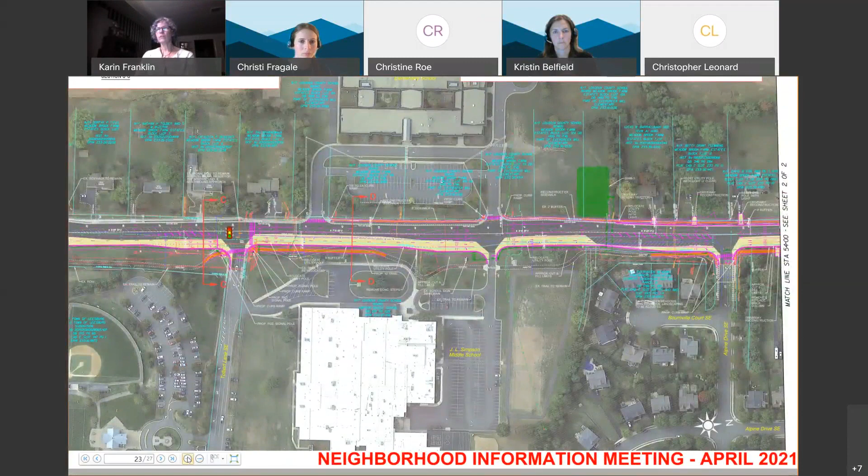Let me start that and then Christi can talk about the details. This project will be trying to maintain the trees, so if we take trees out, we put them back in. If we're not able to do that, we will contribute to the town's tree bank so that trees get put back in the town, hopefully nearby. But I'll let Christi speak to how many of the trees in those areas we might actually be impacting.

You can see some of the trees in this aerial. It's hard to tell exactly which trees, but trying to zoom in, we won't be impacting any of the trees on the southbound side because we're really just maintaining the same sidewalk limits. In front of the middle school, we will have some trees impacted, as the trail is going to get relocated back a little to provide the necessary buffer between the edge of the widened road. So there will be some impacts to a few trees here, it's hard to tell, maybe one, two, three.

As we go north, it's really hard to tell at this stage, but as Karin mentioned, any trees we impact, we're doing landscaping plans as part of this project, it's within our scope to do that. We're going to do our best to replace what we can if we've impacted anything, or if we've come within the critical root zone and our arborist says we're too close with this widening, we'll have to remove the tree. Then we'll do our best to replace it or contribute to the tree bank, as Karin mentioned.

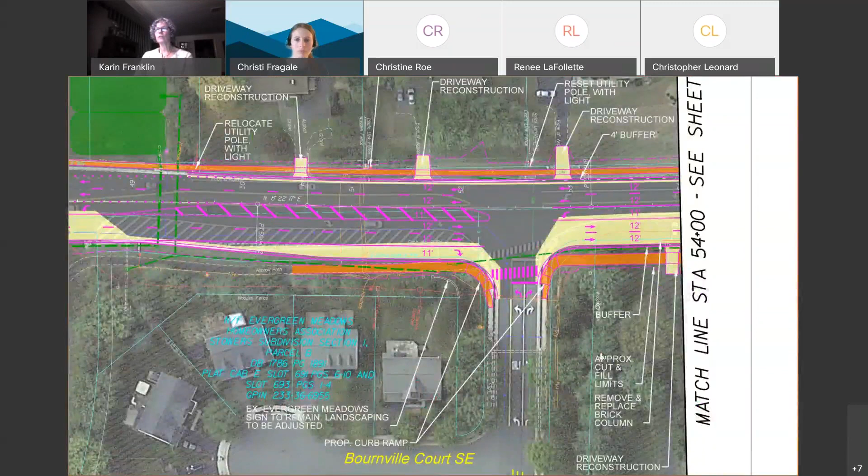Will Alpine or Wallace access be blocked during this project? I think I can start on that one. It's our goal to maintain access throughout this construction project, so the quick answer is yes, we should be maintaining access. The less quick answer is maybe there would be some very short times where we might have to do work that could require closing the intersection, but we haven't completed our MOT plans yet. As we get closer to final design, we'll be generating the MOT plans and we'll know more then.

Christi, did you want to add anything to that? No, I think you said it about right. Like you said, there might be some minimal impacts, but our goal is to keep everything open and moving. For instance, we're installing this one pipe—there could be a quick closure while they're installing it, and then they'll cover it with plates so you can get out, things like that. But we'll be maintaining access.

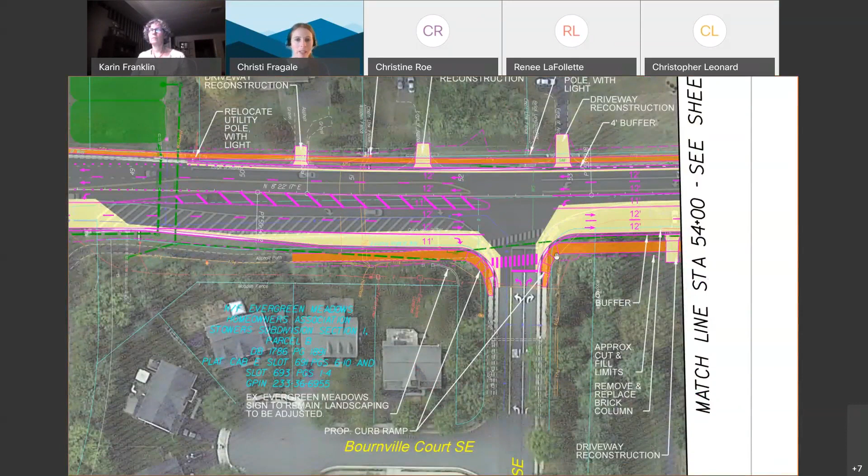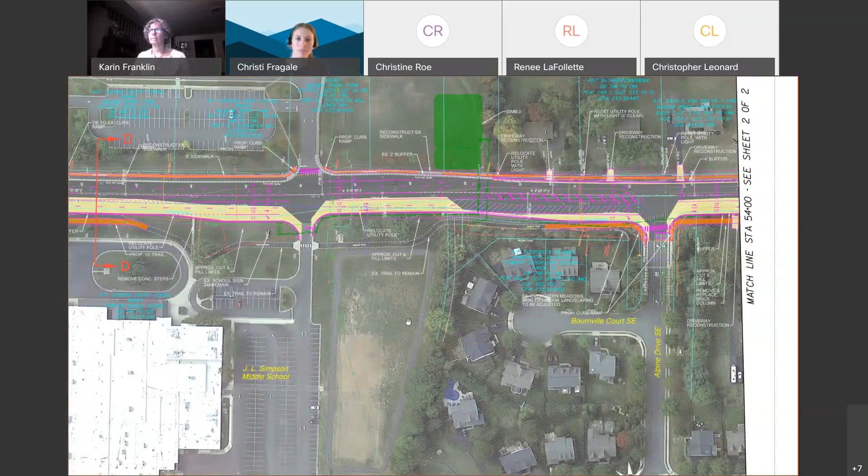All right, Christine. Will additional stoplights be added to some of these intersections? This one's for Kristin. So we are considering a potential signal at Alpine, but we would have to do due process and a signal warrant study to determine if it is warranted.

Would it be warranted in the future? We don't want to put in a signal if it's not warranted. It's a consideration, but right now we don't have a determination of if we would or wouldn't. That would be done more at a 60% design level. As of now it's definitely not included in the scope, but we are going to do a study because we've heard feedback from various folks that we should look into it. So if you're interested in the signal, let us know, but it's got to be warranted. Right now we don't have any additional signals planned for this corridor because we don't believe they are warranted.

Can one of you explain what it means for a signal to be warranted? Sure. We take traffic counts throughout the entire day, counting the major approaches along Evergreen Mill Road and then the minor approaches. I'll go into a few of the warrants: you evaluate peak hour operations and volumes, a 4-hour period during the day, and an 8-hour period during the day. Depending on the combination of volumes on the major street versus the minor street—if one is really high versus another low—the signal could be warranted based on the peak hour, 4-hour, or 8-hour analysis. There are some other warrants I won't go into detail on, but those are primarily the ones we look at for determining if a signal is warranted.

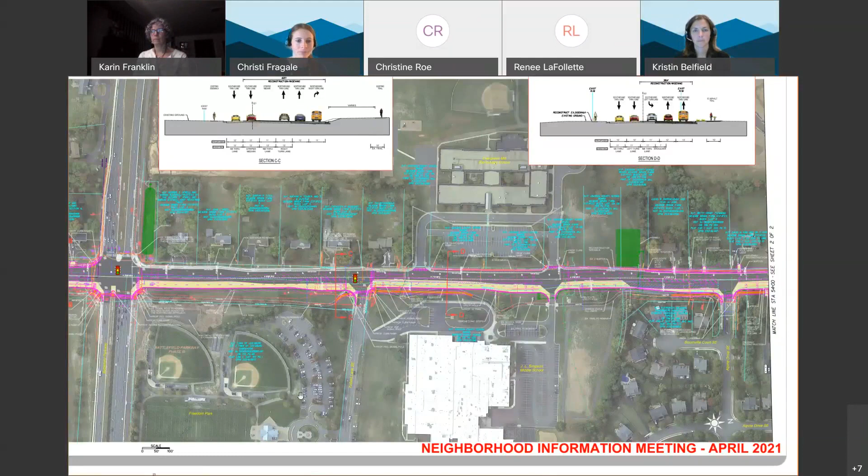Any more questions, Christine? There's more of a comment on this last one: it might be important to note that the HOA property at Wallace and Evergreen Mill is owned by Meadowbrook HOA and not Evergreen Meadows. Okay, yep.

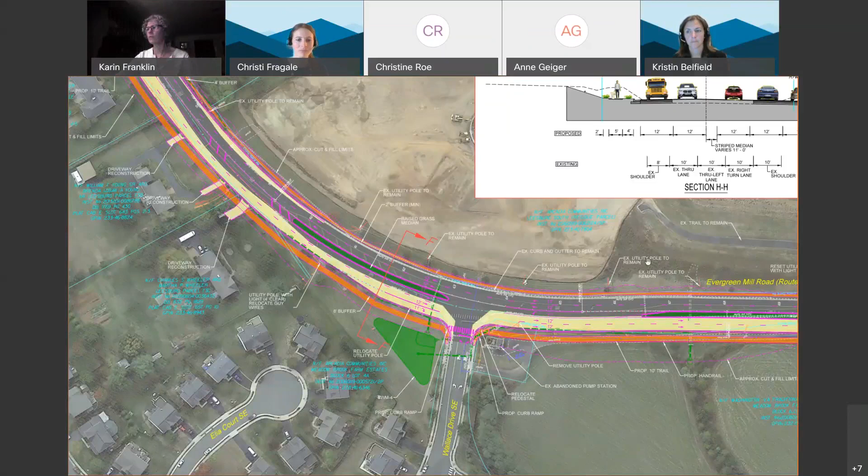All right, I guess they don't have a question. Okay, well, it looks like we've gotten through all our questions at this point. Does anybody have anything else they wanted to add? I think I see one hand, Anne. Was that already taken care of? It is not. Cynthia Pastorana, you are now unmuted for your question.

Hi, please, can you explain what's going to be the impact for the neighbors between Alpine and Wallace on Evergreen Mill Road? Thank you.

Sure. Okay, I think the question was on this area here, and this exhibit will be posted as I mentioned. So if you have very specific questions, you can feel free to reach out. But you can see the yellow area is what will be widening, about 2 lanes or 1.5 lanes or so in between Alpine and Wallace. And then we'll have the trail also running in that area. Along with that, we'll be doing a little bit of driveway improvements similar to on the other side where we're putting a trail. We need to regrade some of these driveways a little bit for the accessible path, so to keep it a 2% accessible path. So you can see that shown in here.

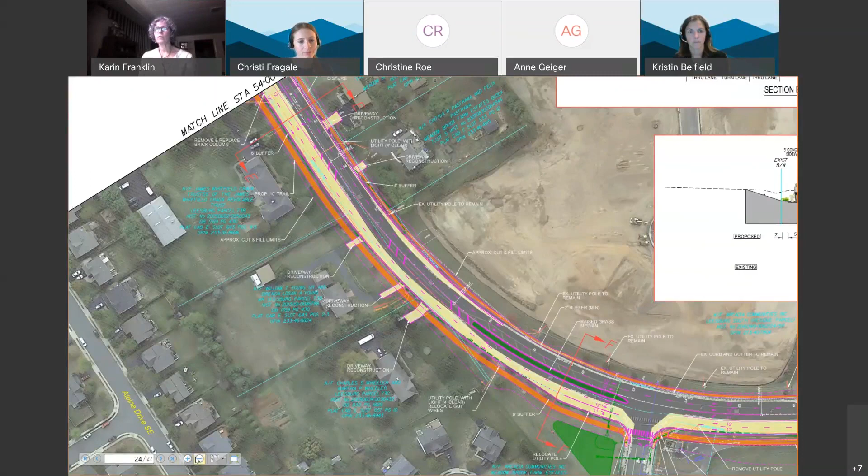So that's right. And again, if you want to know some more specifics, just reach out to me. When we finish up, we'll put that slide back up with my contact information. And again, remember, this is 30%, so we've still got a ways to go before we know exactly what all the impacts will be.

But now's a great time for those comments. I mean, everyone's seen that curve where it's like you give comments here, we can incorporate them. It doesn't impact the schedule or the budget, but if you give comments when we're at 90%, 100%, it's a lot harder to incorporate your comments. So we're really hoping to get some good feedback after this meeting.

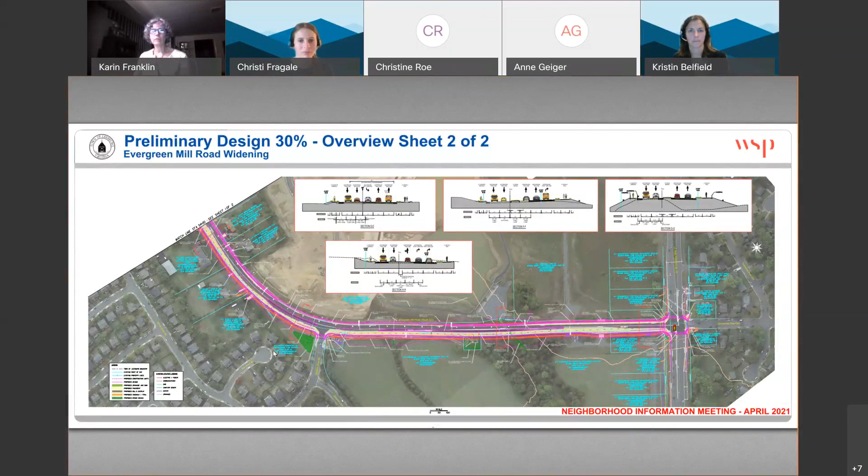All right, I think we've answered all the questions. Is there anything else? Okay, there are a few more questions, Karin, that just came in, mostly follow-up questions. Can you please show your contact information again for everyone in case they want to reach you? Yep, Christi's got that up on the screen. And then the other question is, will there be additional meetings like this as the design matures?

Yes, there will. So that's a really good segue. Thank you very much. We're planning on doing another neighborhood meeting after we complete the 60% and go through the formal review process with VDOT, Loudoun County, and talk to the schools. So I think that's going to be the point where we come back to you. On the slide, I think we were thinking, when were we thinking that was going to be, Christi? Can you flip back to that slide? Yeah, we were thinking next winter, maybe the spring, depending on how quickly we get VDOT comments back. Right, so sort of maybe this time next year, we'll be reaching back out to you.

All right. Anything else, Christine? I have nothing more.